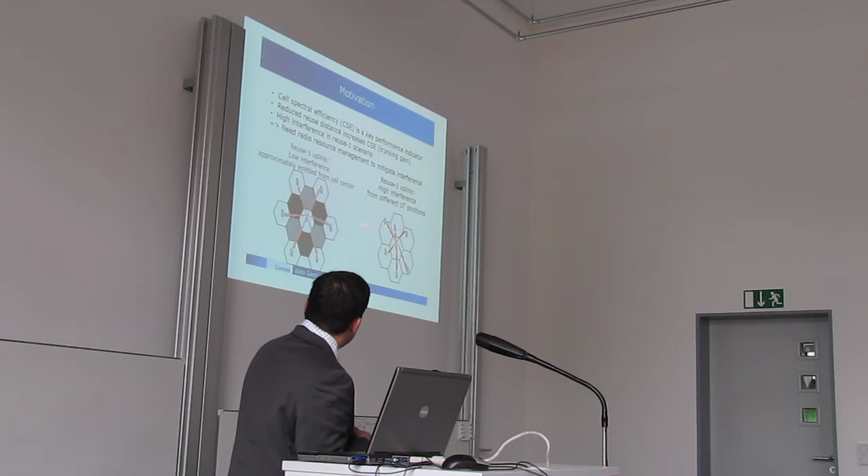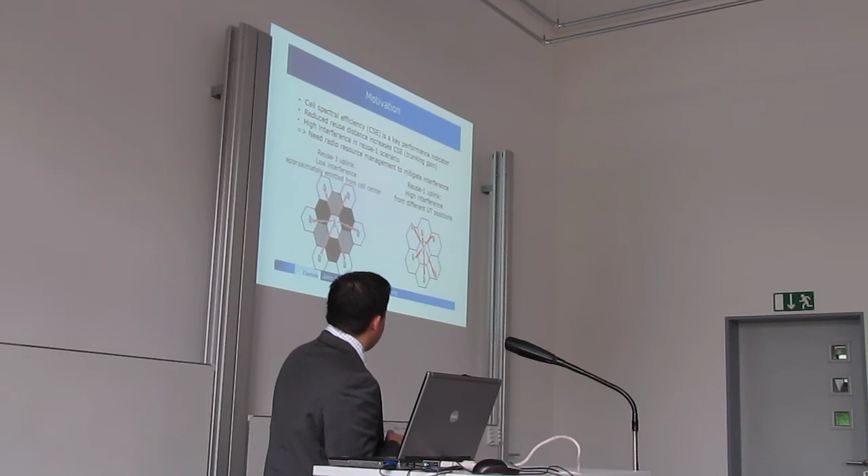We can see here the two cases. The first case, we can see the reuse 3 uplink with low interference, approximately emitted from cell center. And here the other case with the reuse 1 uplink with high interference from different user terminal positions.

This is a very simple example, used with 2 user terminals per each base station. We have here the resource blocks. Each resource block has a color which represents the resource block from the user terminal 1 and from the user terminal 2 in this case.

And also here, the green is from the user terminal 1 of the base station 2 and the red from the base station 2. In this case, we have only 2 possible scheduling combinations, and which one is better? We want to maximize the cell spectral efficiency, and we choose the maximum SINR.

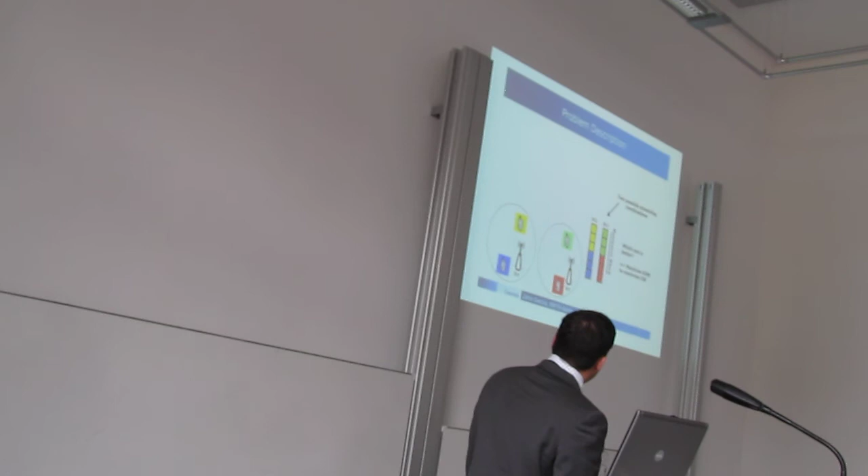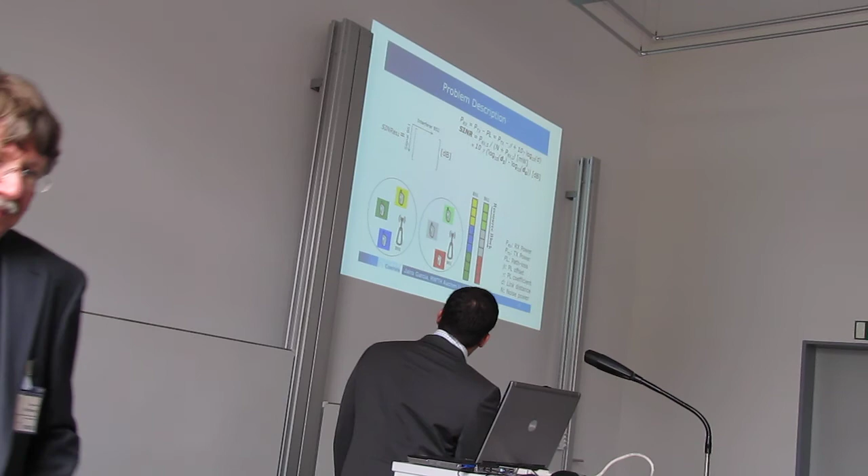This is the same example, but with 1 user terminal more. First of all, we calculate the SINR using the reception power, the transmission power, and the path loss. In this simple example, 2 users are transmitting at the same time, and at the end we obtain this equation of the SINR, and we can omit the noise.

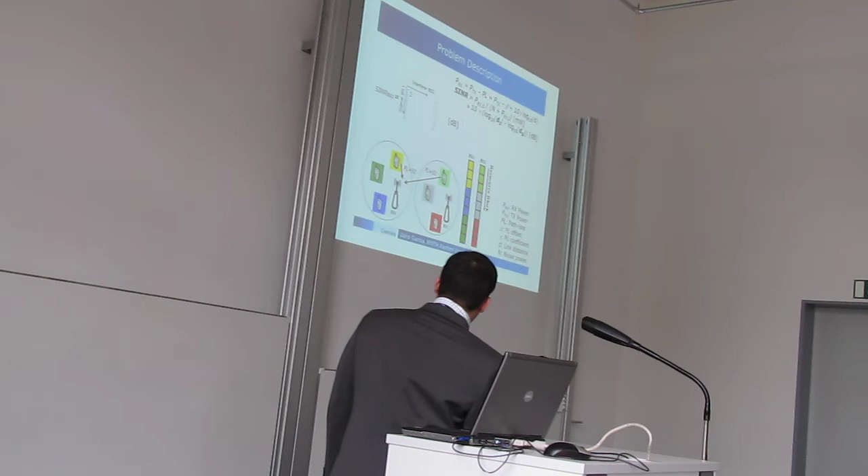At the end we obtain that the SINR depends only on the distance of the interference and the distance of the signal. For the calculation, we use the subtraction of the path loss of the interference and the path loss of the signal. We can see here that this is the fixed value in the matrix. Also for the second and also for the third user.

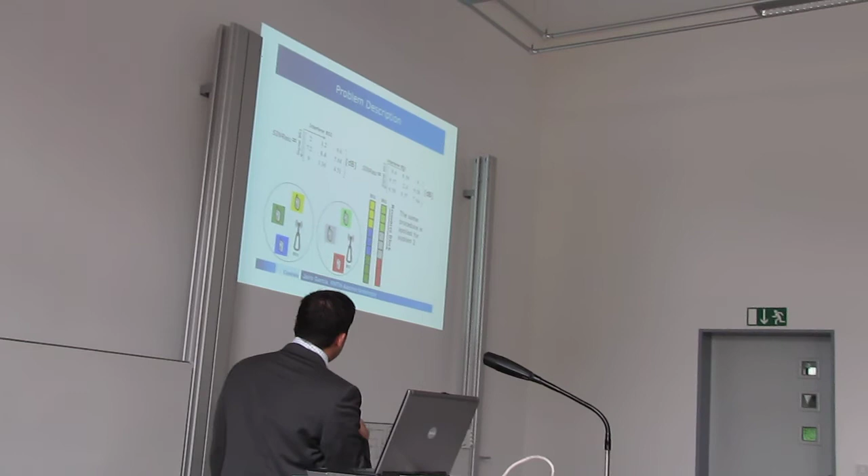We repeat the same procedure for the second user, who is interfered by other users transmitting at the same time. Also for the third one, and at the end we obtain one matrix with the signal in the rows and the interference in the columns. We repeat the same procedure for the second system, and at the end we obtain 2 matrices with the SINR.

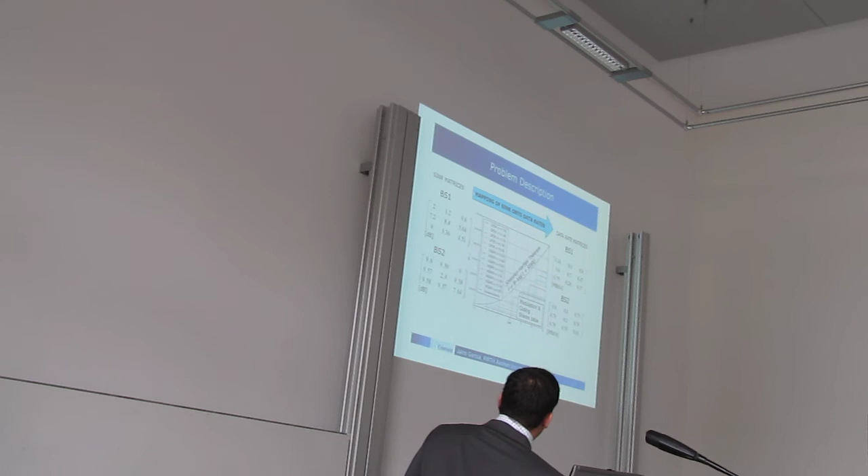The next step, after we obtain the SINR, is to do the mapping into data rates. For this case, we choose 2 ways. One is the analytical way, using the Shannon-Hartley theorem, and the other way is using a table with different kinds of modulation and coding schemes. In this case, we use QPSK, 16QAM, and 64QAM.

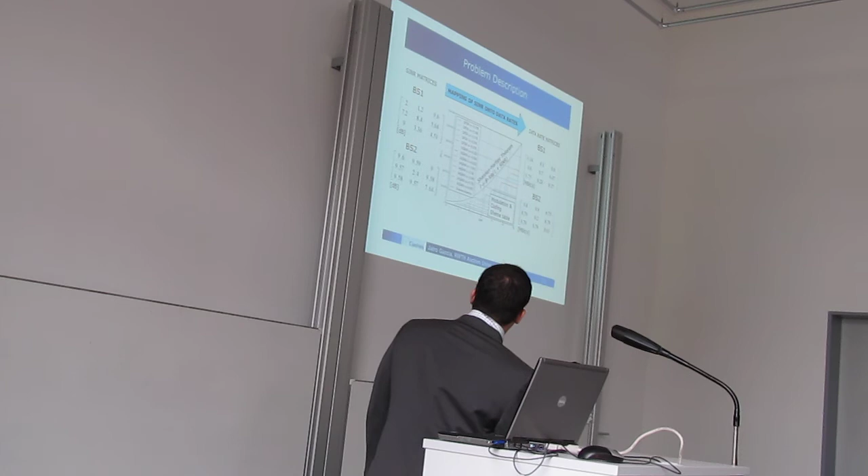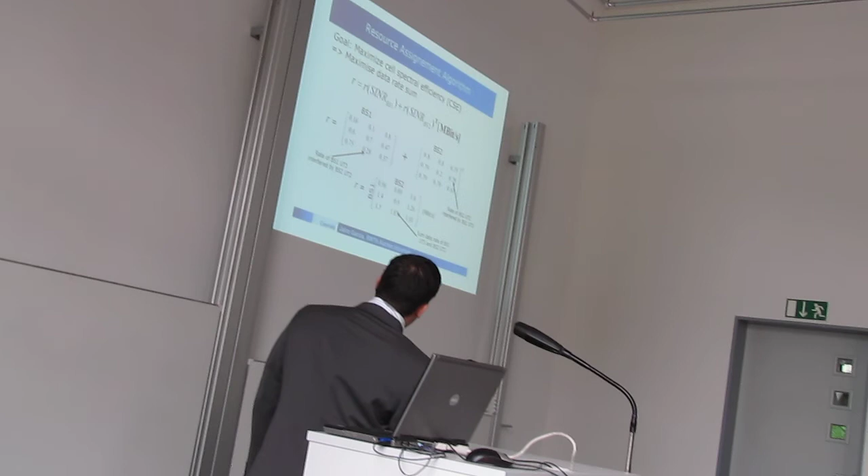Our goal is to maximize the cell spectral efficiency. For that, we maximize the data rate sum. We do the sum in this way of 2 data rates. Each value of the matrix represents the rate of base station 1, user terminal 3, interfered by base station 2, user terminal 2, and also here. At the end, we obtain only one matrix with the rates of the base station 1 and the base station 2 in the rows and the columns.

After that, we apply the resource assignment algorithm. The greedy algorithm, in this case, looks for the maximum value in all the matrices. In this case, it's 1.59. As I said before, this value is composed by two user terminals who are transmitting at the same time. In this case, user terminal 1 from base station 1 and user terminal 3 from base station 2.

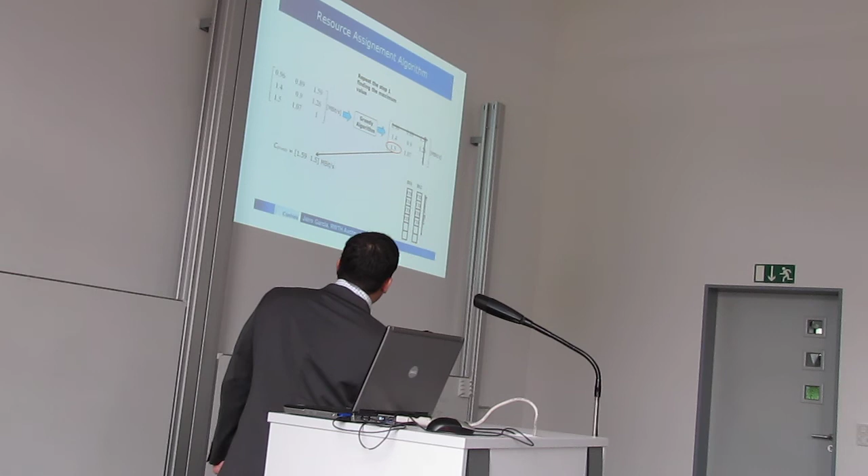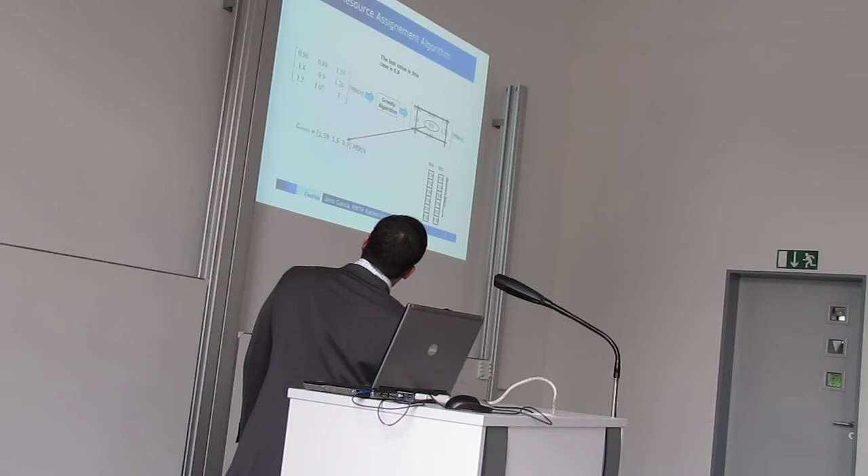And then we schedule those users, and we remove from the matrix all the other users, and we continue finding again the next max value. In this case, the user terminal 3 and user terminal 1. And then we remove again those users. The last value in this case is 0.9. And all the users have been scheduled.

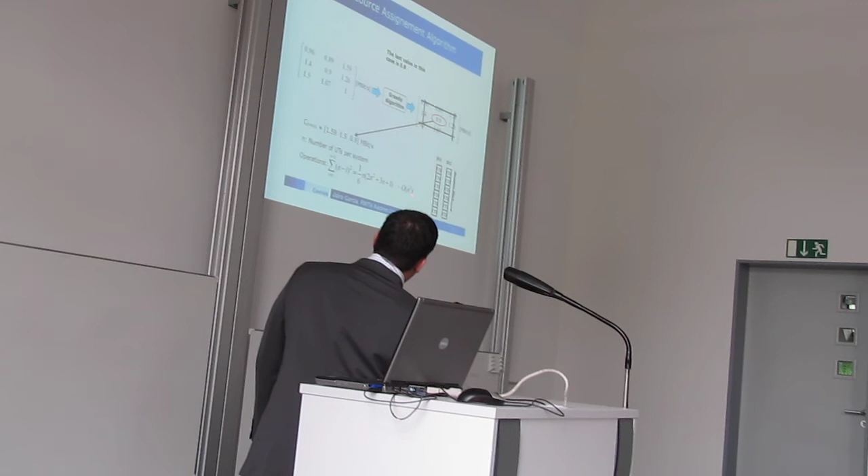This is the complexity of the algorithm: it is O(n^3), where n is the number of user terminals per system. This is the set of values obtained for the greedy algorithm.

The cell spectral efficiency is calculated like this: 9.6 resource blocks per user terminal. In this case, for the simulation, we use 10 user terminals per base station, and the uplink uses 96 resource blocks; divided by the number of users, that is 9.6. The system bandwidth is 20 megahertz, and we sum the values here, and we obtain 1.99 bits per second per hertz.

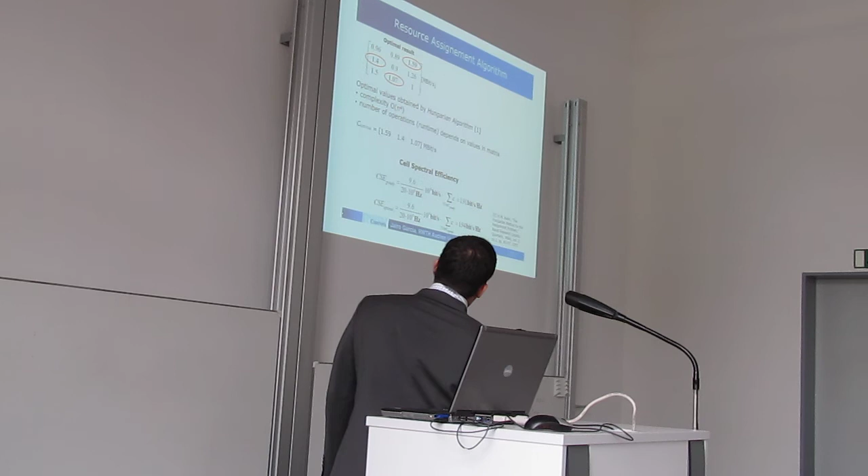And then we compare these results with an optimal algorithm that finds the optimal values. The complexity of the algorithm is O(n^3), and we use the Hungarian algorithm. The number of operations and runtime depends on the values in the matrix. We can see the difference. It's not so big.

So what you've seen before was just an example, basically using three user terminals, and here is the scenario we've actually simulated. Besides all the cellular scenarios we've already talked about today, there's an even simpler standard scenario standardized by the International Telecommunication Union, the so-called IMT-Advanced Indoor Hotspot scenario. Here we have only 2 base stations, as we mentioned before. Those are 60 meters apart, and usually we deploy 20 user terminals randomly in the whole scenario.

But for our work at the moment, we have to have the same number of user terminals per base station. So here we equally distribute 10 user terminals per base station. We use 100,000 drops, so on each drop the 20 user terminals are distributed at a different position. Why this high number, I will explain later.

We use a quite simple channel model here, so we only consider path loss; we do not consider small-scale fading, which is in the original model. And we also do not consider shadowing. This is also due to our limitation at the moment that we have to have an equal number of user terminals per cell. The first results I'm going to show you are with free space propagation, so a path loss coefficient of 2, and later we're going to change the path loss coefficient.

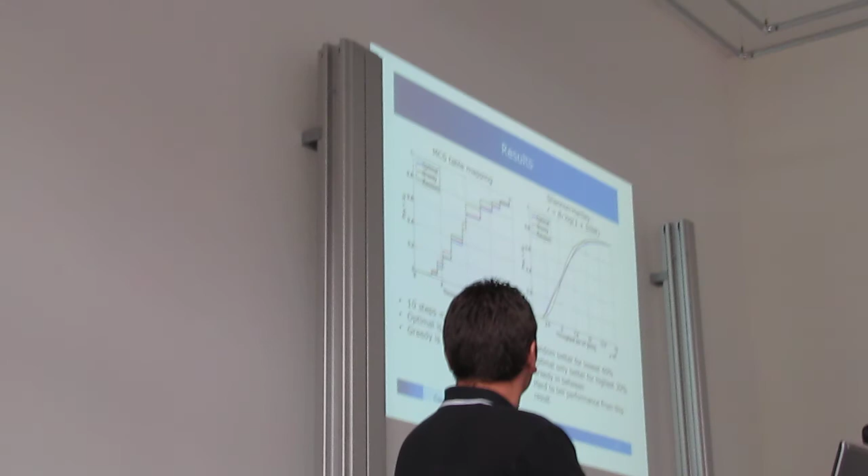In blue, you see the results for the optimum assignment. In red, the results for our proposed greedy local search algorithm, and in green the results for a totally random assignment, so no optimization applied. And actually, what we see is that just starting at 30%, so only for the best 70%, we actually get a gain.

Of course, we try to maximize cell spectral efficiency, and this often does not go well for the bad users. So actually, for the worst 30%, it is better to use a totally random assignment. But for the other 70%, we see a gain if we have an optimal assignment, and we see here the red line actually comes very close to the optimum.

This is if we use the 13 modulation coding schemes for optimization. This is why we actually see only 10 steps, because we do not have any SINR values below 0, so we end up with 10 different modulation coding schemes we can have.

On the right side, you see the same results if we apply the Shannon theorem to map our SINR values to data rates. And well, here, as we see, nothing. So it's like half of the time the random assignment is the best for the bad users, of course. Then, of course, the optimal assignment is very good for the 50% best users. Well, and the proposed greedy algorithm is somewhere in between. So it's really hard to tell if we actually increase the cell spectral efficiency here or not.

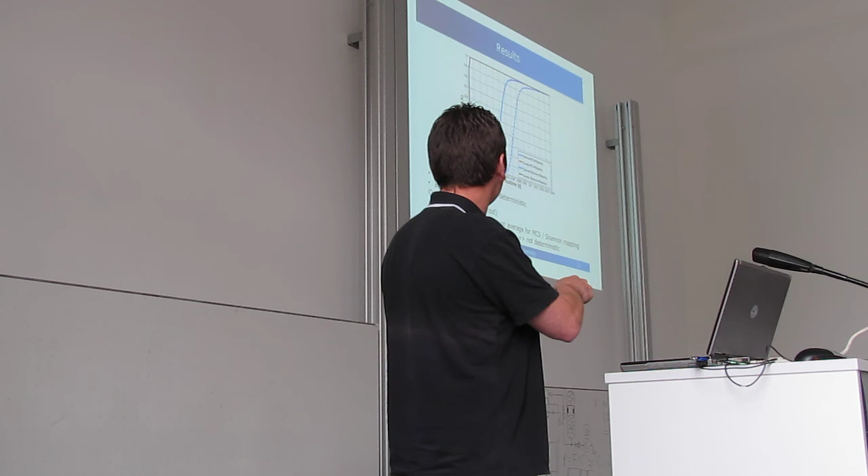So the runtime goes from 2 milliseconds all the way up to 6. And then it highly depends whether I have the modulation coding scheme approach or the SINR approach, because with the Shannon mapping there's even more different values appearing in my matrix. While for our proposed greedy method, the runtime is mostly around 300 microseconds. So this is especially below the duration of an LTE frame or the transmission time interval.

Of course, this was done on our Pentium machine, so it cannot be directly compared to real system hardware. But most importantly, it is pretty much deterministic, so it just depends on the number of terminals. And of course, this is a two-cell example. If I coordinate more cells, I will need more runtime.

Okay, so I'm coming to an end. What we have done here, we have presented a heuristic algorithm for radio resource assignment in the uplink. And we've evaluated the performance of the algorithm, mainly looking at cell spectral efficiency, but in the written work you can also find some remarks on the cell edge user spectral efficiency, so the 5% here. So by our algorithm we can increase the cell spectral efficiency by up to 5%.

And the actual gain you can get depends, in our research, on the channel model, and in reality, on the interference levels. What we've also found out is that if the algorithm uses the Shannon-Hartley formula to map SINR to data rates, we almost get no gain, and this is really remarkable because a lot of research work focusing on optimization, either the assignment problem or power control problems, uses this formula. So it would be really interesting to redo this work using real modulation coding schemes, but then often you don't have a closed solution anymore.